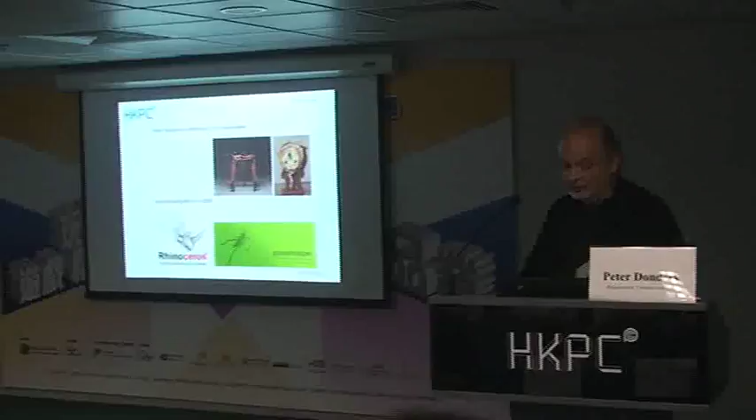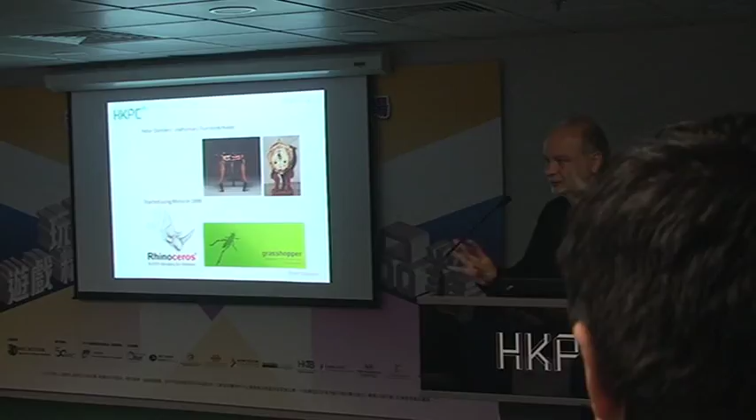For the furniture I made by hand, I was always looking for some organic stuff, comparison to Gallé, Victor Horta from Belgium, architect, all in the Art Nouveau area around 1900, so that was my favorite type of furniture. So I came up with...

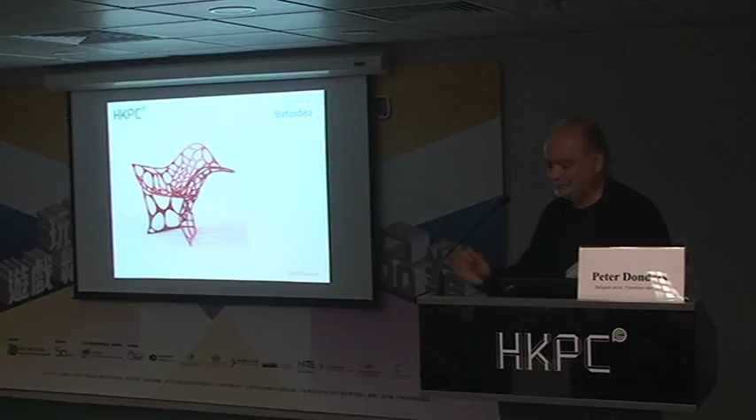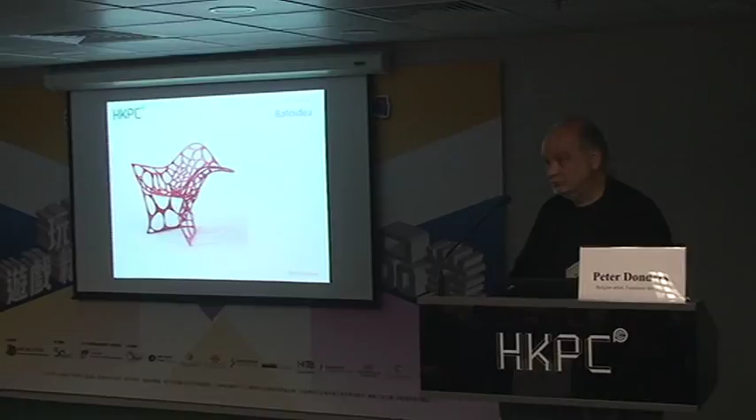Batoidea, that's a Latin name for stingray fish, and actually this was a contest for T-splines, the use of T-splines in extreme. So I did a contest in Salt Lake City with Matthew Sederberg and stuff like that, and I got the second place. I don't mind getting the first place or getting the second place.

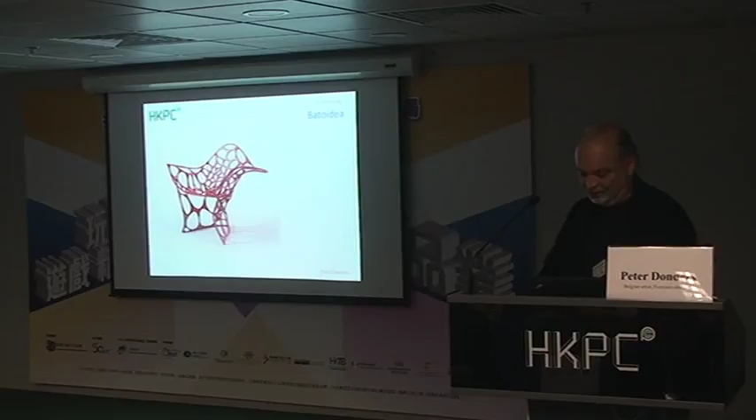The comments were it was a very nice chair, but it wasn't possible to make. So that's what we do in Belgium. We just make it. We don't talk about it.

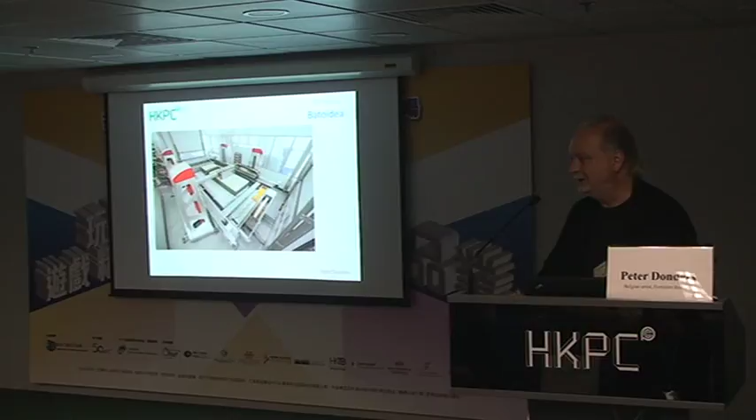We do it. So I went to Voxeljet in Germany. They got these huge sand printers. They can print sand molds about cubic meters and bigger. So it's the same principle. They just spread the sand, they glue it together, and where there was no glue, they blow away the loose sand.

So it's very, very simple. For this case, the chair was designed in Rhino using T-splines, so you get a CAD model, not a mesh model, but a CAD model. For the sand printing, you also need a CAD model. So in Rhino, you can split up the molds, and you send them over as a STEP file or an IGES file, and they just print it.

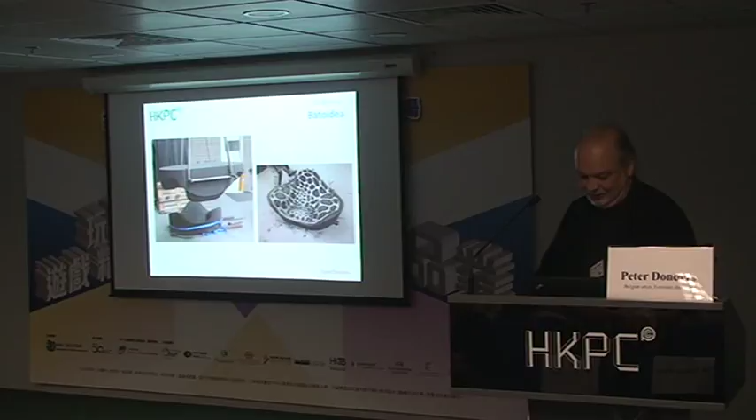You get it back by truck, and you mix it, put it together. You put some casting channels on it, and you can cast it. So actually, it's a little bit more complex than as I explained, but it actually is quite simple.

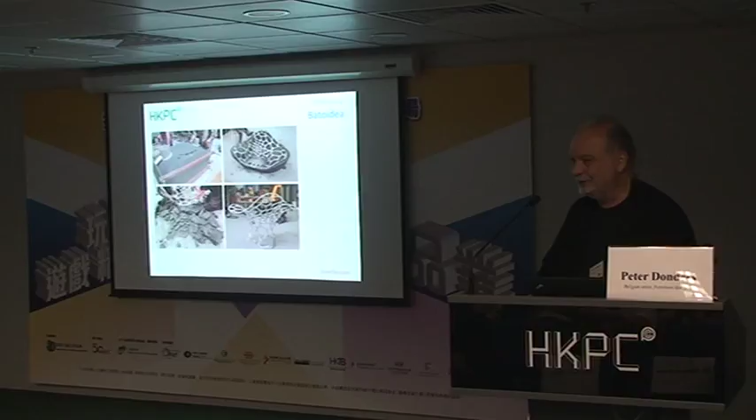So after a few weeks, I sent back these images to the jury for the contest, and that's how we do it in Belgium. And they sent another reminder saying, oh, okay, you're able to do this stuff, you can do other stuff.

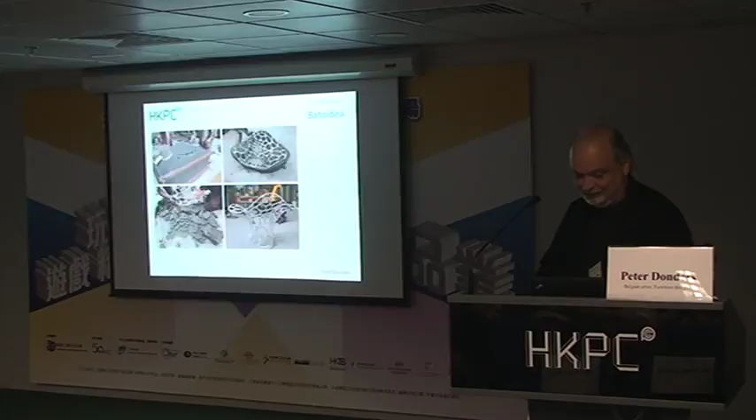So that's my son then in the chair. So it's a real one. This is a render, and this is the real product. So it's the same. That's what our friends told before. You can design something, you can show it, and you can make it identically as you show it.

So Materialise is one of the biggest 3D printing companies in the world. It started in Belgium 25 years ago, so they had a meeting in 2015 for the 25th anniversary, and there was an exhibition making the difference in making.

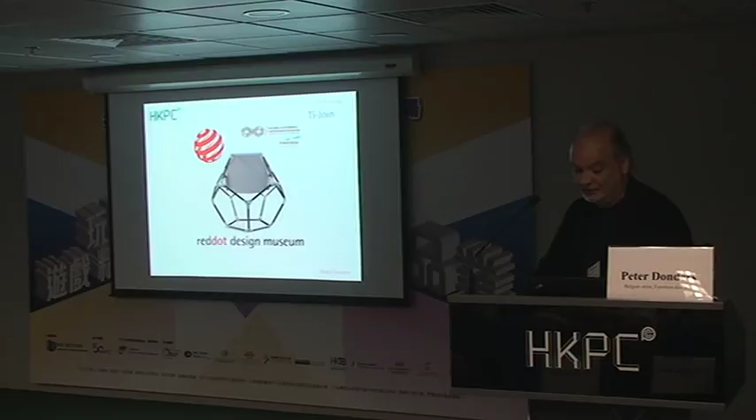So I designed this chair, the T3-Joint. The basic principle of the T3-Joint was also a cast frame, but I thought it was too big to print, too big to cast, so I figured out another way to make a combination of tubes and 3D printed parts.

In this case it would be titanium, so all the joints are designed in Rhino and sent over to a metal printer, and they came back polished, and it's manually polished. And then we could put the chair together.

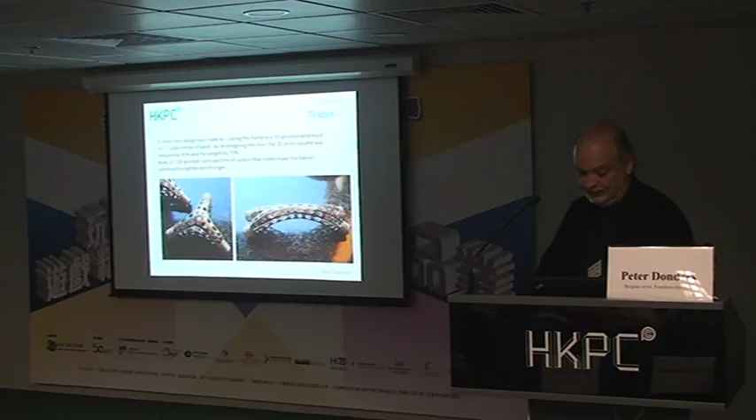Also, I'm not strict to materials or techniques. I try to use everything. I make a mix match from everything.

So I worked, for example, with Anne Van Hoey. She's a famous ceramist in Belgium. So I design, sometimes I make 3D designs for her. The molds are printed positive. We make a silicon mold, then we make a plaster mold, so we can pour in the clay for reproduction.

The bowls on the right side are a project with disabled people, so it's a combination of several companies. First of all, the design was done by the two of us, then Materialise was printing the mold, the positive mold. The company with the disabled people, they make ceramics on a low scale, low budget, and they were able to keep the people busy, they got a job, they got a real product, they were proud of making this product.

And then there came in a big company, Serax in Belgium. They distributed, they looked for the distribution of the product. So these molds are now going global. So that's also very interesting what you can do with just the way how you use 3D printing. If you need a mold, you can print it.

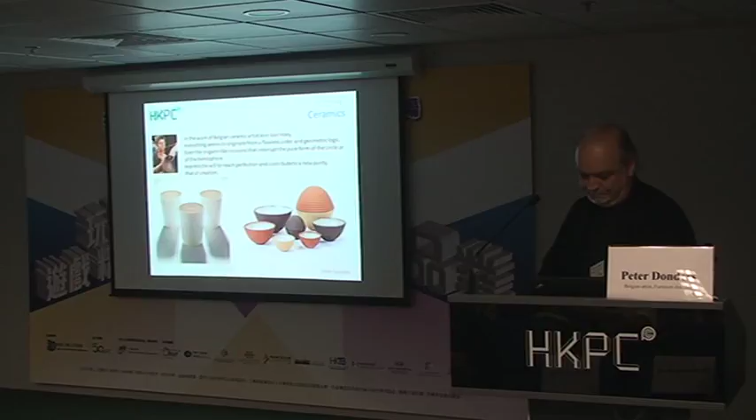If you need another size, you can scale it. It's very fast, very easy. So this is one of an evolvement of the little bowls. We can scale it, we can manipulate the structure.

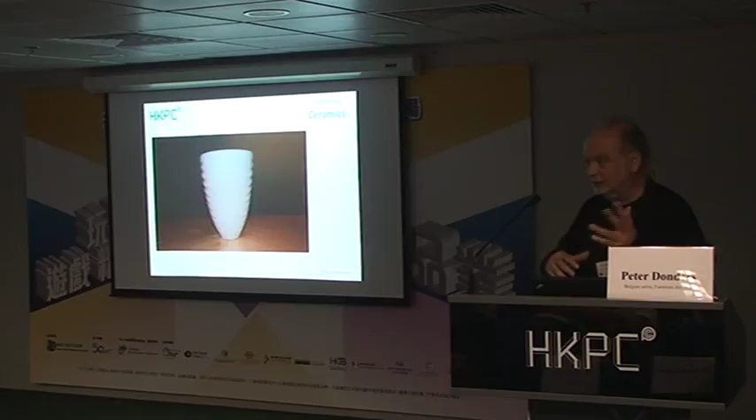This one was made in Taiwan, I guess, together with this example of little coffee cups, teacups, water cups, whatever. Very thin porcelain, ceramic, and it's translucent, so thin it is.

The pattern is made with Grasshopper, and I will show you later because I use the same patterns on different designs, so you can do a lot of funny stuff.

You cannot expect a printer to print a shiny piece like that. It's impossible. A lot of people don't know. Most people think it comes out of the printer and you can buy it, you can sell it. No way, it's always a lot of labor.

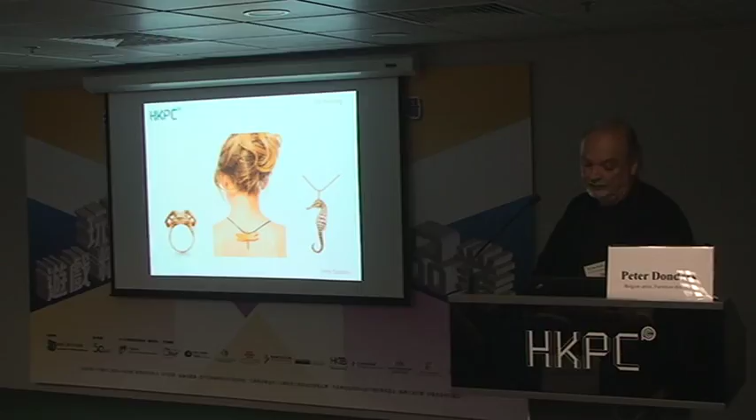So what I do with furniture, I can do in jewelry. It's all actually the same, because when I design a chair, you can sit on it, but if you make the chair small enough, you can wear it around your arm or your neck, or you can make it bigger, you can live in it. So it's a chair to sit in, a chair to live in, a chair to wear around your neck. It's a size.

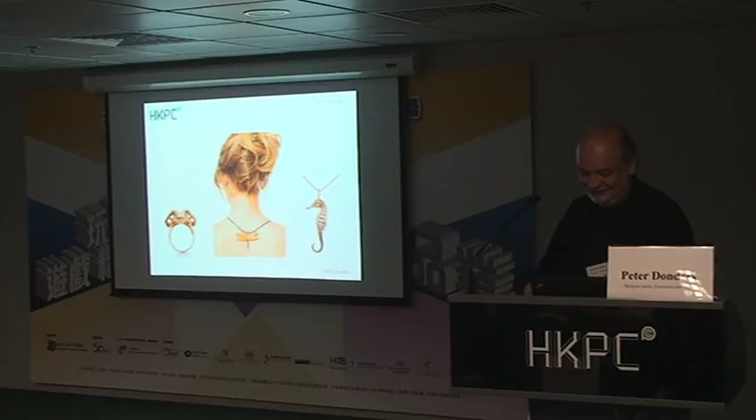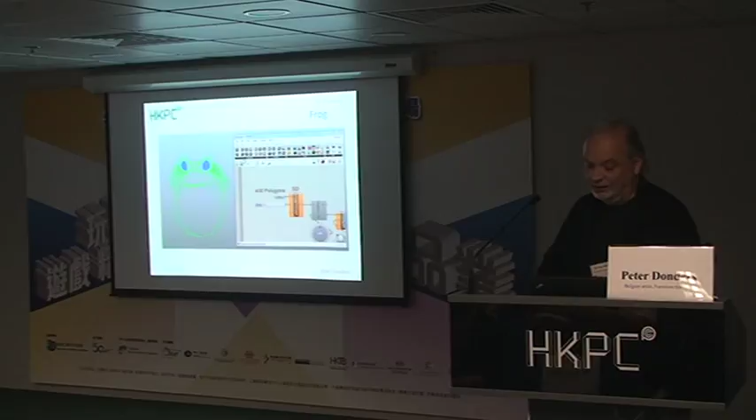So this is the way I work. I try to go back to the basic structure. The exceptionally high dense mesh at the end is parametric, so I can manipulate that. In this case, the frog, I guess this is the right one, yeah.

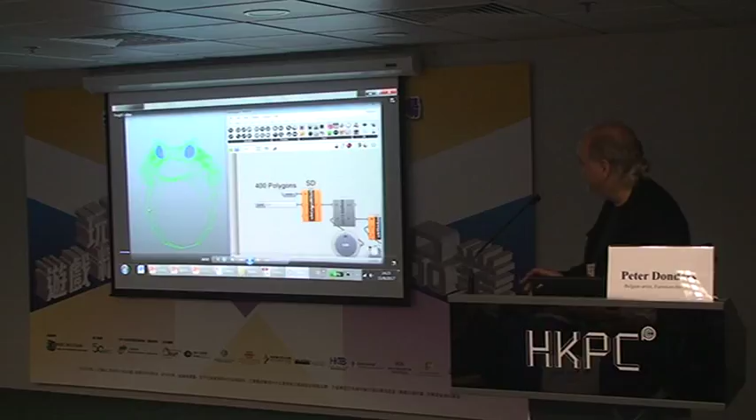So I start with this, a mesh, a very basic mesh. It's T-splines, it's 400 polygons. And then you can see, you can subdivide it, it gets smooth. So that's very simple. And then you can add a structure on it and a thickness.

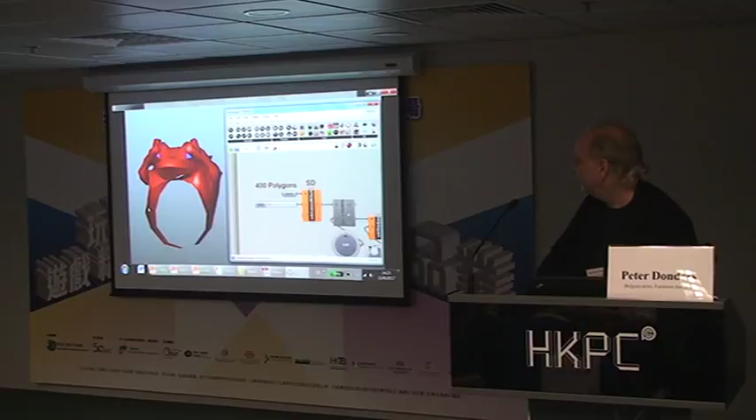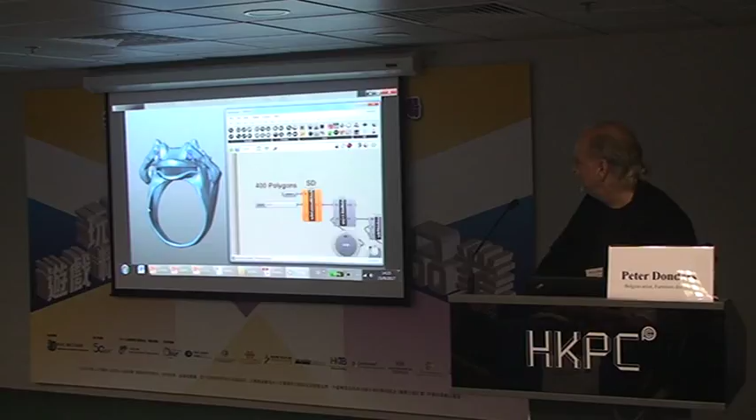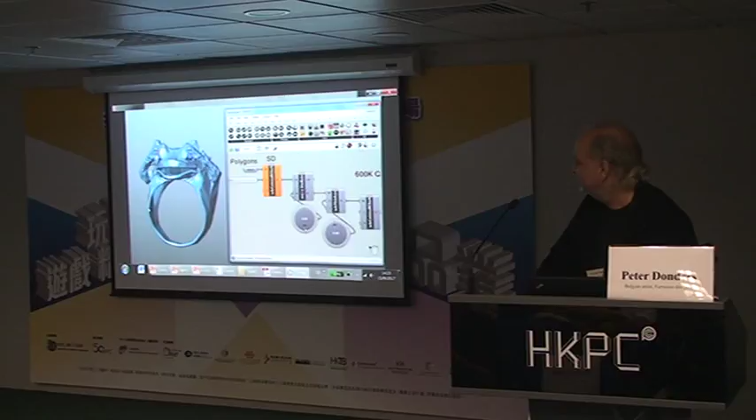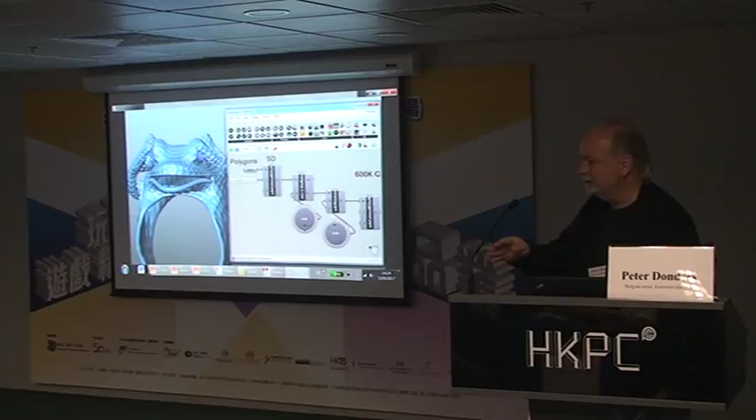So this is the thickness and the structure, and then I can adjust the structure. The thickness is also, it's 0.98 millimeters for printing. And then if I subdivide the base model, the structure goes up. See?

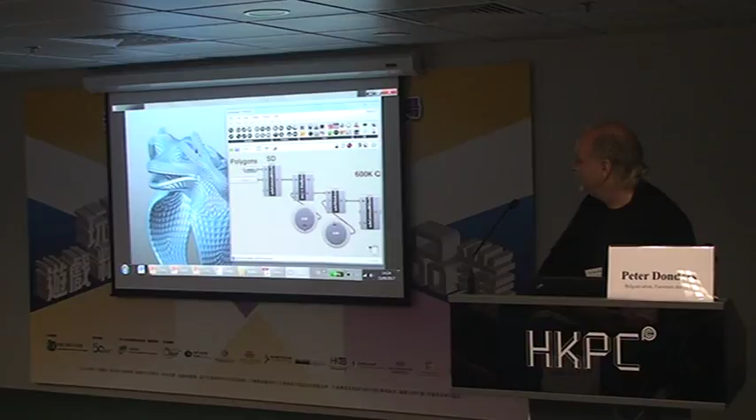By hand, this is impossible to make in wax. This is way too complex. So I start with 50 polygons and I end up with 600,000 polygons.

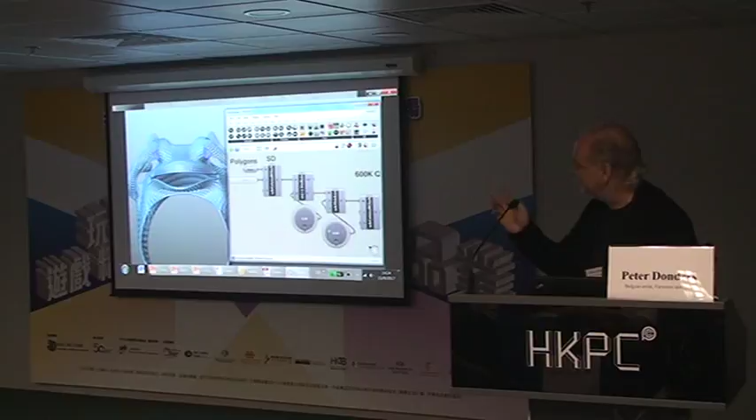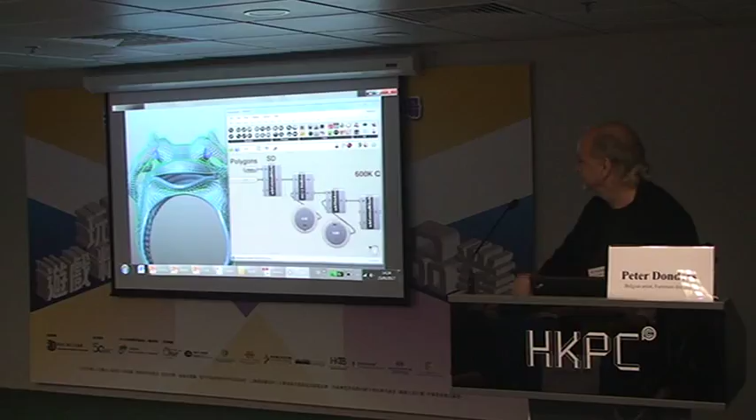Everything is adjustable because in a moment you will see when I change the base model, I can let them talk, I can let them move, and it's all the same, and everything will follow the steps behind. So this is the T-splines.

So you could make thousands of different frog rings doing funny stuff. I kept it with just two, but it's possible.

One nice thing about this, with the Grasshopper, you get a very tight STL file. There are no edges, so it's fun to print. You just put it in and they print it. It's no problem.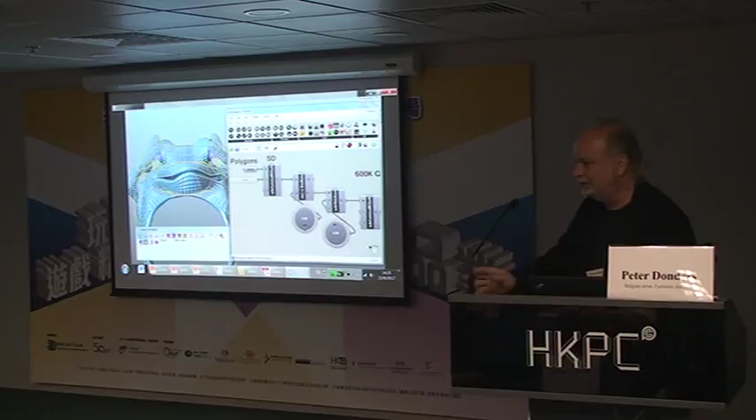Let's undo. Yeah, undo.

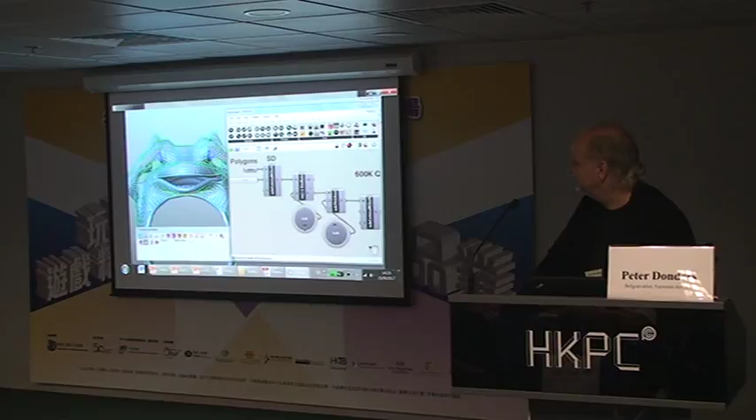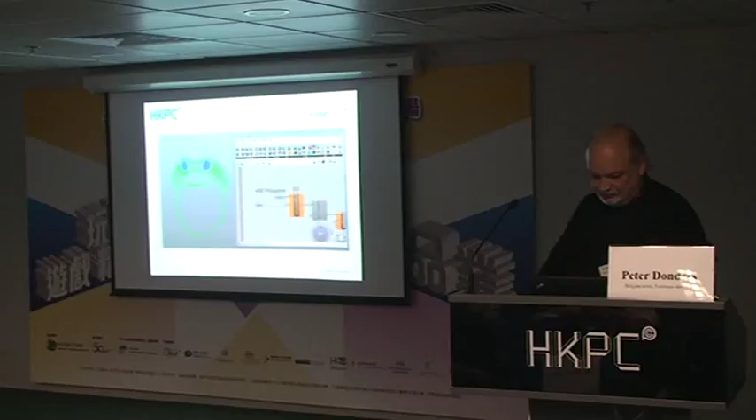So that's for the jewelry, for the frog. This is actually the end product.

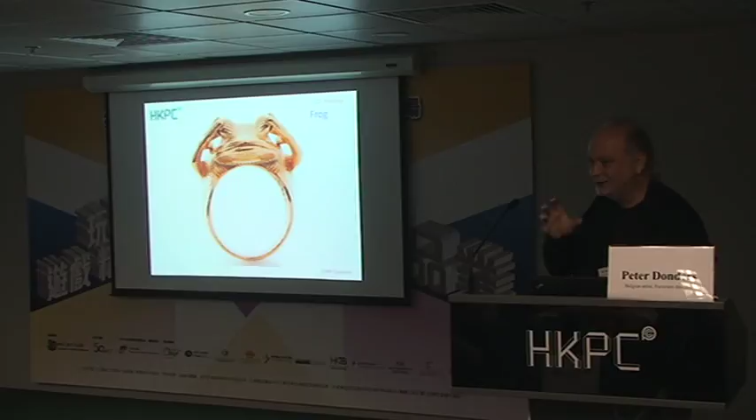And if you imagine it, it's only this big and it's very detailed. You can look with the magnifying glass, and you see all the details.

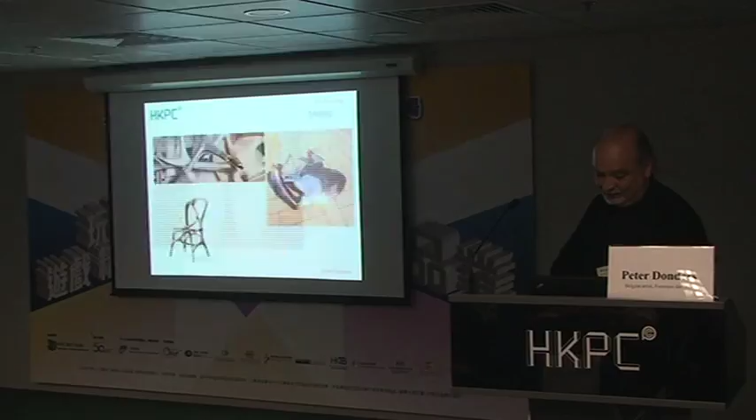So I keep it short. I can go back to the first one. The first slide was an egg cup. It's also printed ceramics. This was not possible to make in a traditional plaster mold because the mold would break and the product would break.

Using different materials for different designs, you can do almost whatever you like in 3D printing.

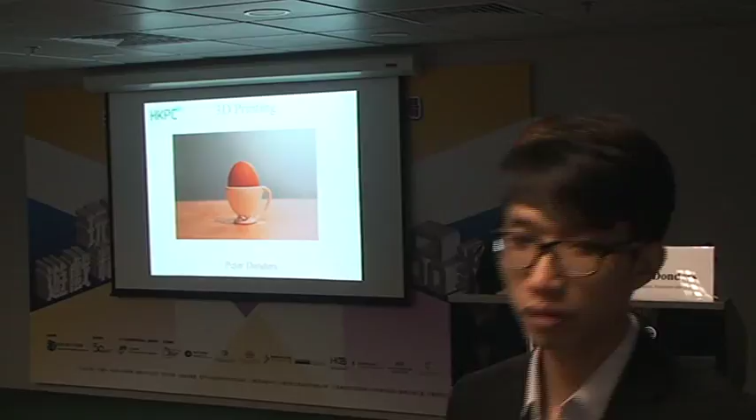How would you compare 400 polygons with ZBrush? You know ZBrush? No, the frog from 400 polygons was done with T-splines software. ZBrush, you get different results, I didn't compare with ZBrush.

How much does this one cost per polygon? At the end, 600,000 polygons.

No, not the cost of that, I mean the cost for the software. The cost of the software is free. Can I get it free from the internet? Yeah, Grasshopper is free. And then you've got Rhino, it's about $1,000. So it's not so expensive.

I wonder, the chair you made for your son, or what your son was sitting on, is it cast iron or aluminum? Cast aluminum. But it's no problem what you pour in, you can do bronze or other materials. I did this one.

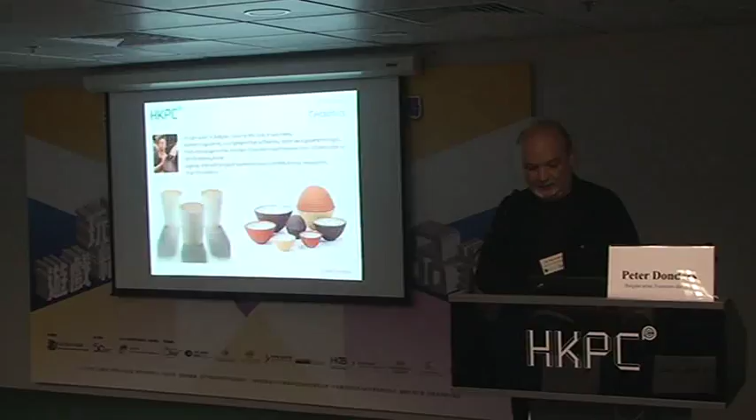This one is titanium, it's printed, and this one is bronze, polished. But casting is all cheaper than printed titanium.

Printed titanium, when you get small pieces, it's interesting. If it's getting bigger, it's very expensive. Also the titanium is limited by size, 25, 20 something. If you have to print a chair in titanium and put it together, you cannot.

You can weld it, but normally at Materialise aluminum prints, they glue together with special glue. So you can print the chair in pieces and glue it together.

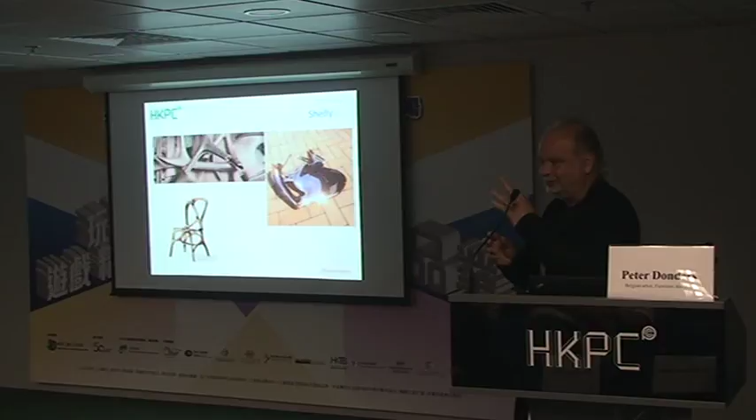I see when you look with the microscope on 3D printed titanium, it's a landscape. It's not smooth, it's not nice. So then it has to be finished. There's a lot of work after the printing.

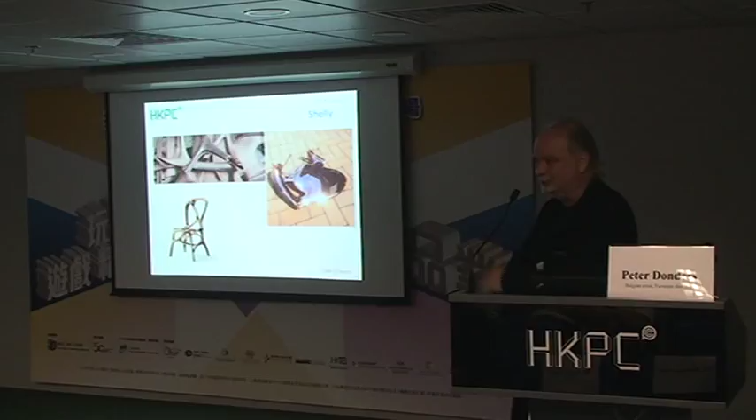Also our friend told about there's one gold printer over here in China. I think the platform is this size. It's 1 kilo of gold powder, it's $30,000 powder. So if you blow, you lose. And the product is not shiny what comes out.

Printing gold is 3 times the price of printing wax and casting it in gold. For example, a ring like the frog ring, I get it printed and cast in silver and polished at my home, I don't move from my chair. I just push the button and pay something like $30 to $40 in silver. If you have to print it in gold, it would cost you $1,500 printing in gold. If you cast it, it would cost you $500 in gold.

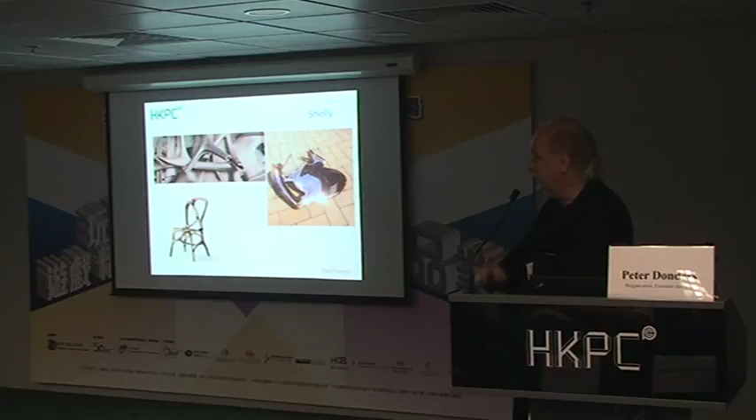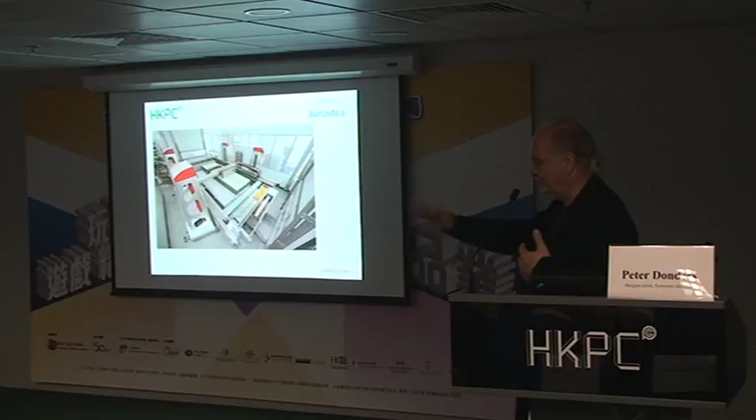Is there a size limitation for cast aluminum? Yeah, cast aluminum's size limit is the mold limit. In this case, the mold limit is the printer size limit. So this is a very big printer, it's over 2 meters. How about the height? 80, 90 centimeters, in cubic meters.

Oh, the chair, this was 130 by... it's almost 1 cubic meter. If you see the sand print, it would cost 4,000 to 5,000 US dollars per cubic meter.

That's very cheap for a big object. If you print the chair in plastic, it would cost you 10,000. You have the plastic chair, you have to make the mold around it, now you've got the mold.

So the sand mold gives you the freedom to make undercuts and stuff like that. You print the stuff you cannot make with the CNC machine, you can print in sand.

I came across the sand printer, I saw a movie from Ferrari. They were using sand molds for testing their engines before they moved to the steel molds. So they perfect first with sand molds, and then they make it for production.

And the mold cannot be reused? They're working on it, because this has undercuts, yeah? So you tear apart the mold when it's a sand mold, like traditional sand casting. But they're working on materials when you've got efficient angles on the mold, you can print like some kind of concrete and use it up to 100 times.

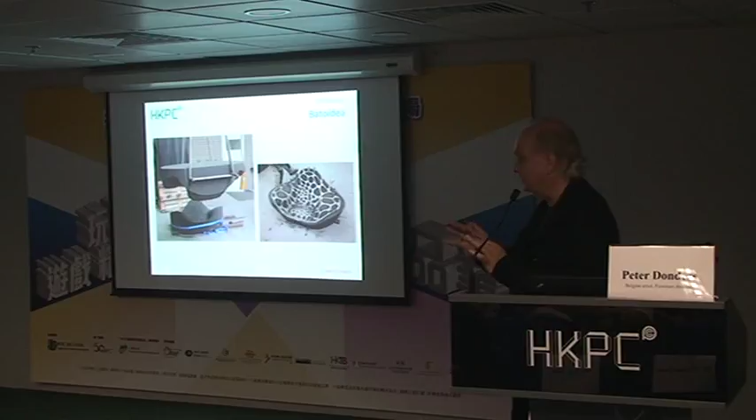For a small series, it's possible to print the mold also. And the accuracy is very nice, very good, no lines, no nothing, it's smooth. It's a German company, Voxeljet.

So there's a lot of potential in big size printing, casting, and it's quite affordable. All these pieces are not very expensive to make, but in a production environment it would not be possible, the molds would be extremely expensive.

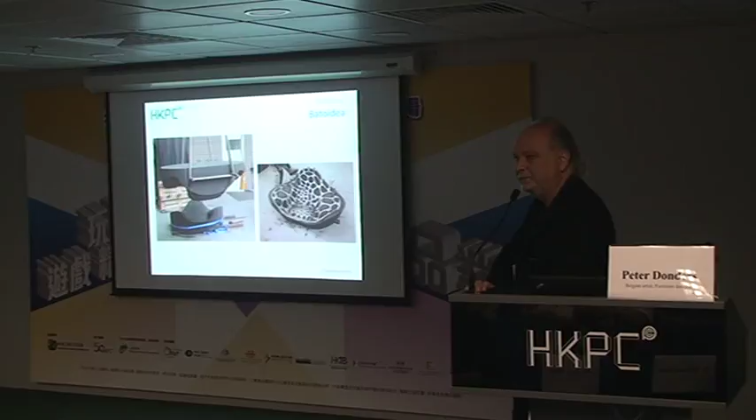So you have to go there to see what they do. So you can't just send them a file. Yeah, you have to go there and watch. Otherwise they're gonna screw it up. No, they don't screw it up.

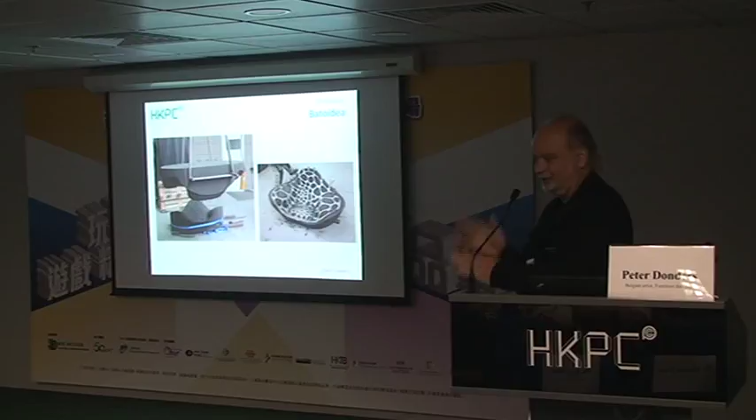I heard about the company, so I sent them an email asking, can you print this? I sent them the files. They confirmed the price and said okay, print. I got it three weeks later, they sent it in sand, so there's no problem. I don't have to go there. I trust people, and if they deliver, I pay.

But it's very interesting, I think, for semi-production, rapid prototyping. You could do very nice productions before investing the big money, and you get a really nice object. So it's not limited to furniture, you can do parts of cars, parts of anything cast, very complex shapes. Just print it in sand and you cast it.

So it's a balance for what you'd like. If your part fits in the metal printer, you could print it in metal. If it's too expensive, you could go to the sand mold and make a small series. You can combine many pieces in one mold and fill it up, and you can use one part of the mold to be the next part for the next, so you can build it up. But that's engineering, so there are a lot of possibilities.

Also for jewelry, it's not printed in gold, it's printed in wax and cast and polished by hand. It's somewhere in Russia, or I don't know who does it, but it's quite expensive. Also, if you see what the regular prices are in China for a ring, it's quite expensive printing stuff, but you can personalize everything, you can put your name on it.

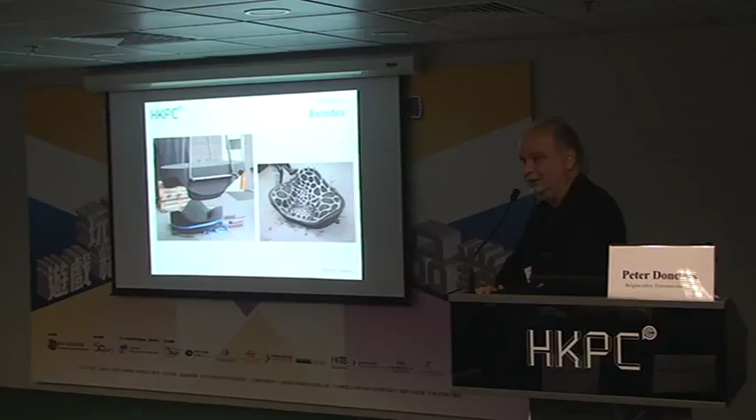I think for the medical sector it will be much faster improvement for 3D printing than in the household, because everybody is different. You can make an MRI scan, you can bring a part. If your arm is missing, you can scan this one, flip it over, and make a new one. That's how they do it.

Any more questions to Peter? Feel free to ask. Yeah, feel free, I'm here. Peter, I have a question for you. I've actually never been to Belgium, and I'm very interested in the Belgian market. So in Belgium, in the 3D printing industry, do you have more designers strong in design, or strong in technical, mechanical machine stuff, would you say?

In Belgium, it's different than here, because our colleagues are talking about design, making content for the machines, and that's correct, we have to make content, everybody has to make content. But in Belgium, we've got Materialise, and they are a way advanced company, 25 years doing 3D printing. So everything is possible in Belgium. If you need a part, you can hire a designer on their website, you can just say, can you make me this part? There's a shop, everything is available.

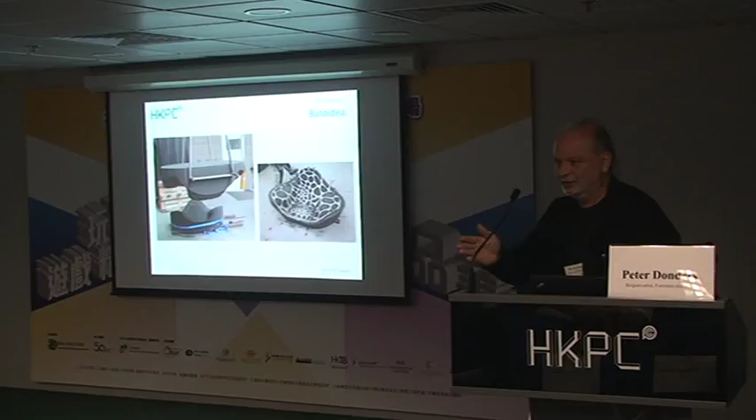Also in Holland, you've got Shapeways, it's from another university. So Materialise comes from the University of Leuven as a spin-off, and Shapeways comes from Eindhoven. It's a different country, but actually almost the same period. Also, one of the patents was filed by the Belgian guy from Materialise for, I think, slicing or something, I don't know, but it's expired now, it's 25 years old.

But engineering, there's a combination in Belgium, there's arty-farty stuff and stuff you can use. It's not that the arty-farty stuff you cannot use, but actually there's no need to do a lot of stuff like that. So what I was saying about engineering, at Materialise they've got 1,000 or 1,200 people working there. The biggest part is developing software for the medical sector. They don't show it to the outside world, but that's the main business they do. So they're printing kidneys, and they will last an hour now, real live kidneys. So that's something to think about. It's getting very technical at that end, if that's what you mean.

Engineering for machine parts, car industry, they do it all. They've got these mammoth printers with liquids, 2 meters 20 by 1 meter 80. So that's the biggest liquid printer in the world, and it's also 20 years old now, still working. They've got a whole bunch of those machines, so they can print a real body, full-size body. But it's also expensive, it's time, it's layers, it's always size, time, material, gravity, blah blah blah.